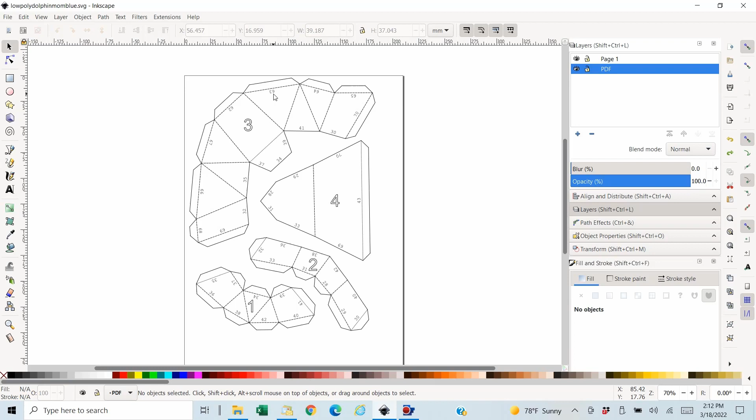So I think for this, instead of doing each piece separately like I showed before with the numbers separate and the score line separate, what I'll do on this is all the numbers first. I'm going to zoom in a little bit so I can see better.

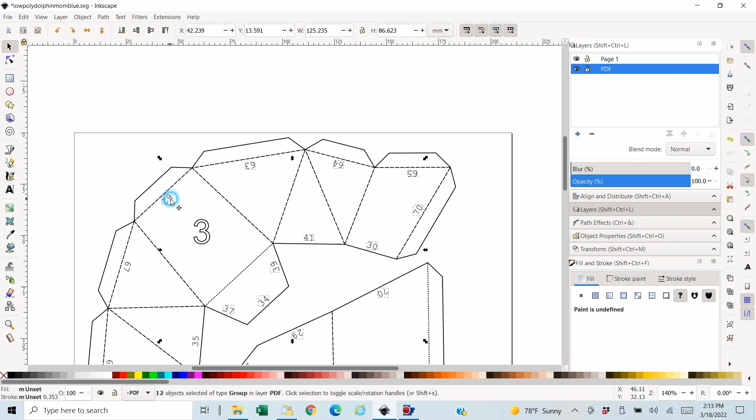It would be nice if Edit, Select Same worked for this, which it does with some PDFs, but it did not on this one. So we'll have to do each of those separately. Go around - it's a little tedious, but it still is, I think, more optimal than printing and cutting and scoring by hand.

So in this case, I'm doing every number on the page, not just per piece. I can sort of eyeball it to see if there's a little bounding box around it, to confirm I've clicked it. But inevitably I'll miss one, and I showed you before what to do about that. Hopefully this time I won't, but if I do, I can show you again.

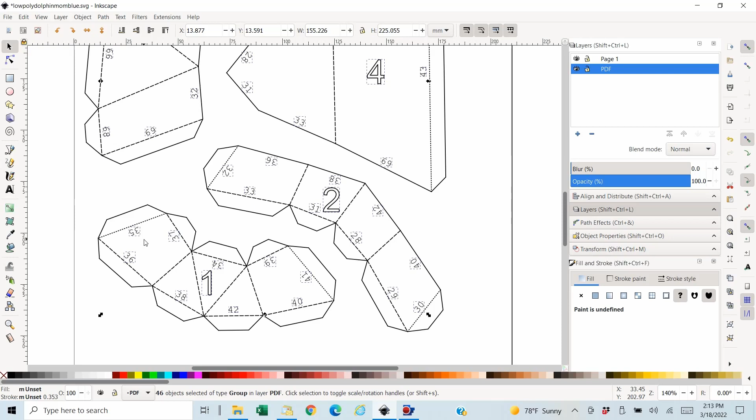So, seems pretty good. I'm going to edit, cut, and make sure I got them all, which I did.

Good, so I'll go to page 1, edit, paste in place. Remember, while they're selected, do object to path and combine. So now they're all together.

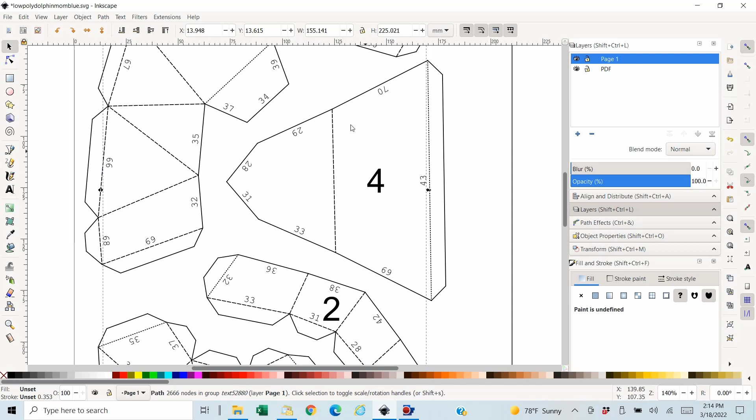So in Design Space, I'll only have to change that to pen and it'll take care of all the pieces, but I won't be able to separate them. So there are trade-offs with both ways.

I'll hide page 1 for right now. And so now I'm going to grab these valley fold lines, and it looks like most of them are that type.

I'm going to combine these even across pieces so that when I'm in Design Space, I only have to change them to score type once instead of piece by piece. They'll be combined together, so that's not good for separating the pieces, but in this case, I know that'll work for what I'm doing.

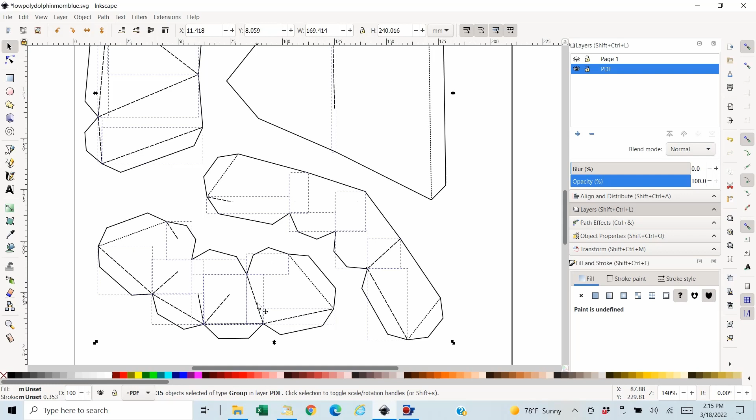I think I have them all. I'll do edit cut. See, I forgot one there. So I'm going to edit paste back in place, keep them still selected, and add that one. I'll try it again, edit cut. Told you I'd probably miss one. And I missed another one. So we'll do edit paste in place. And I'll grab this one.

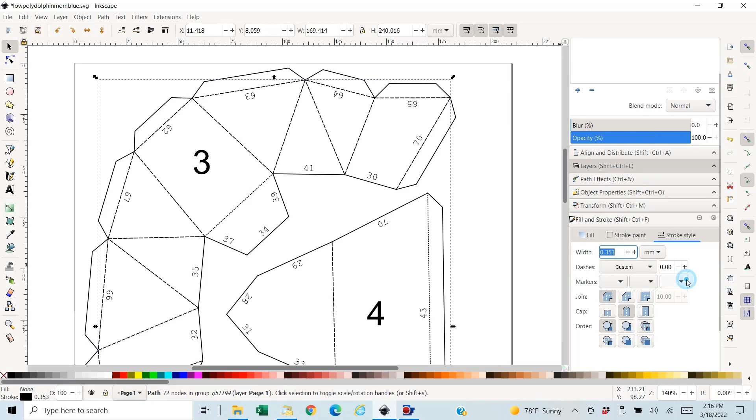Now we'll edit cut and go to page 1, turn the visibility on and do edit paste in place. While they're together, we'll do path combine. Go to stroke style, change from custom to a solid line. Now's a good time to save. It's always good to save your work because we don't like crashes to happen after we've done some work. So I'll hide page 1 and see what's left.

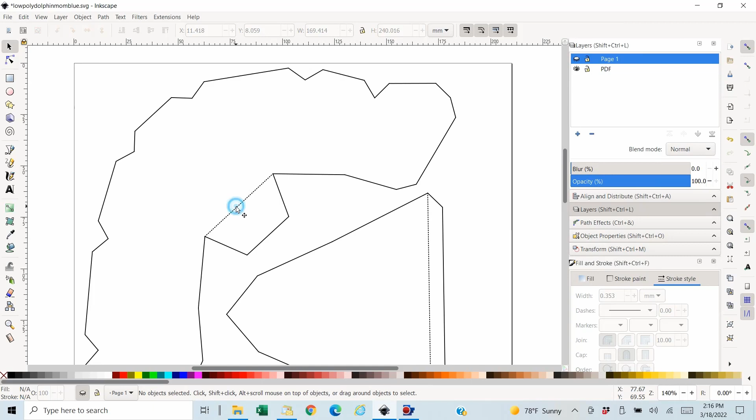So we've got a few mountain fold lines. This is a pretty simple PDF as far as number of pieces per page. I've had some that had 12 pieces per page and there were dozens and dozens of numbers.

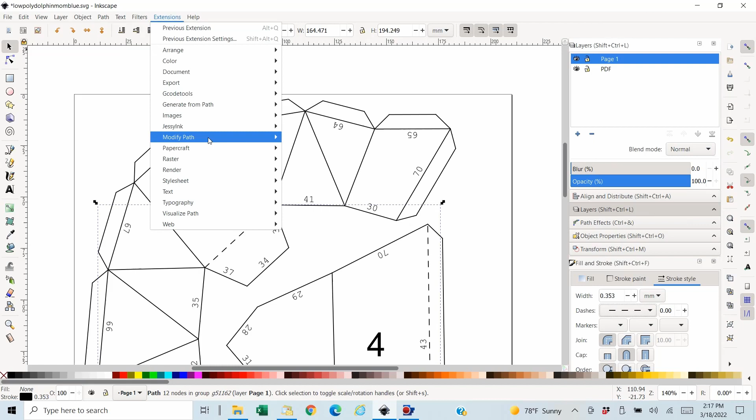All right, so edit, cut. Make sure I got all those lines, which I did. Turn on visibility of page 1. We'll edit, paste in place. We'll combine those. Remember, these we want to turn into dashed lines. Then go to extensions, modify path, convert to dashes. And I'll save it.

Turn off this page and see how we're doing. So we've got everything except the outlines.

Here I don't think I could just fill this shape. I don't think it's a closed loop. No, that didn't work, so I'm going to have to at least combine these paths. I'm going to try to grab these first, might be easier. Make sure I get all of them.

I'll zoom in and see what I got. And I got a few here by mistake, so I'm going to unclick those. Sometimes it's just as easy to click and select as it is to do the bounding box select. Now, that one might work. We'll see what happens.

For this one, I'm going to just cut for a minute and see if it cuts just these or also cuts that out. All right, it didn't grab any of these, so that's good. So I'm going to paste back in place. I like to work on this layer when I fill this. Didn't I say paste in place? Oh, on page 1. I want to edit, paste in place.

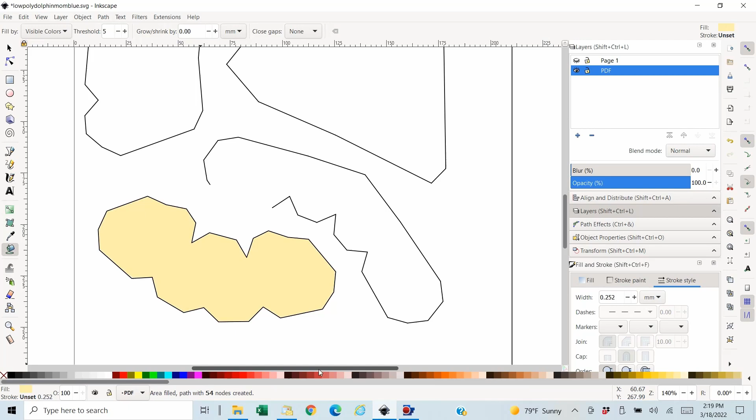I don't think I need this whole big box, so I'm going to hold down shift and not do that one. Now it looks like these are just the outline, which is what I want. So I'm going to combine those and fill. I should change the color because this is going to be blue, just a light blue.

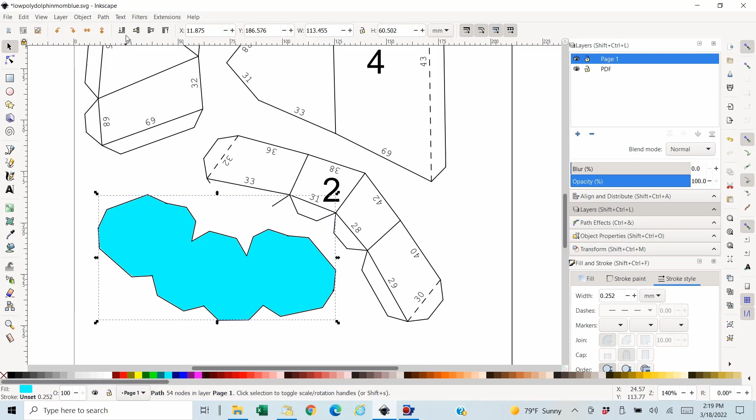All right, and then we will select that, cut, go to page 1, paste in place, move to the back, turn off visibility of page 1, save.

There's something here, so what I'm going to do is delete this first from this PDF layer. I'm going to click on whatever this is and delete it. That's just particular to this PDF, I've not seen that before. I don't quite know what's going on with that.

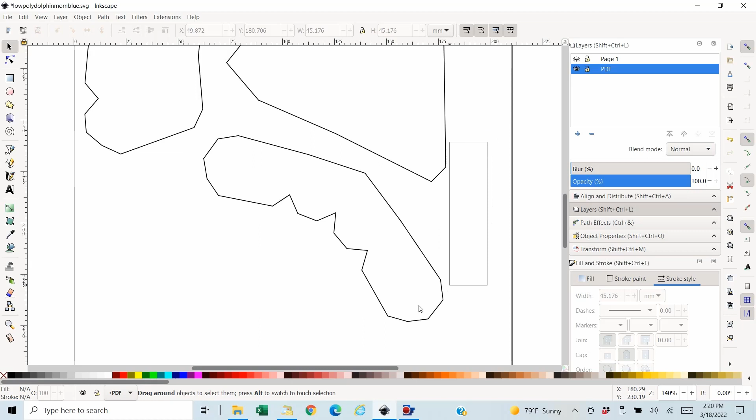So we'll try to grab this piece. I'm going to mostly— nope, I didn't get the top of it. Mostly grab, I still didn't get the top of it. Mostly grab that. And I got this line, which I don't want. And I got this, which I don't want. So it looks pretty much like this is what I want.

Although all of this, it looks like there's something there too. So I'm going to hold down the shift key and click here and see if I can get rid of that big bounding box, which I did. So these are just the lines, and it didn't get these. So let's click that, and that, and that. Now it looks like I got it.

I'll cut them just to see. Okay, and I'll paste back in place. That is what I wanted. That certainly reveals there's some junk there and some junk there. So for right now, I'll just move it to the top, and I'll combine.

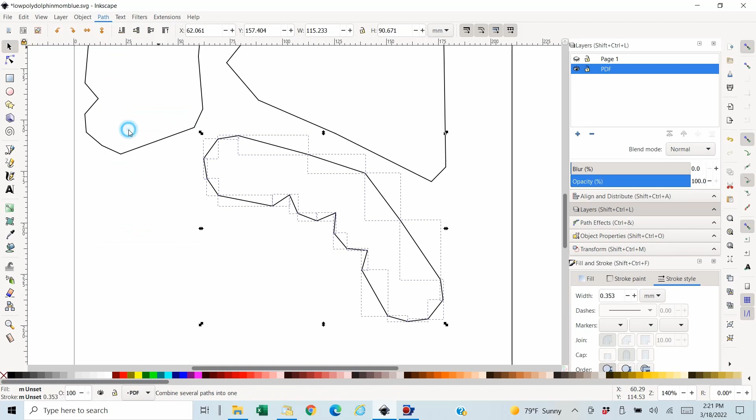You don't want to move this because the lines and numbers we've already done are positioned for this to stay exactly where it is. So that's why I'm not trying to move things around before I get them grouped and combined.

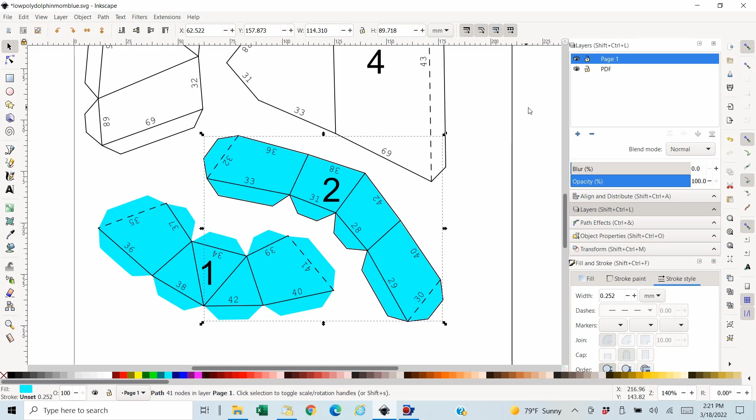So we'll fill this, grab the fill, cut it, go to page 1, paste in place, move it down, turn off page 1 visibility, and save. Save often, as I've mentioned before.

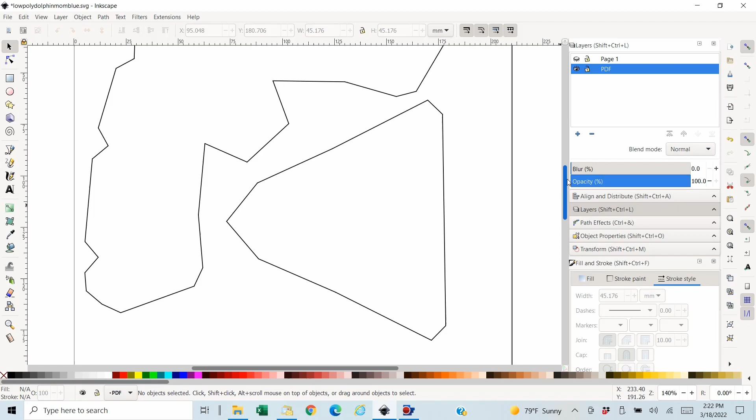Going to take this and delete it, and there were some things here showing up so I deleted that. They probably won't matter because they're just on this PDF level, but might as well get rid of them.

All right, let's do this piece, see what we can do, get most of it. Here's a square that doesn't look like it belongs. I'm just going to click off that and see if I can grab it and delete it. I don't know what this person did with this PDF.

All right, so that looks better. I didn't want this little line, I didn't want this one. That looks pretty good. We'll cut and see. Yep, we'll paste back in place. We'll combine.

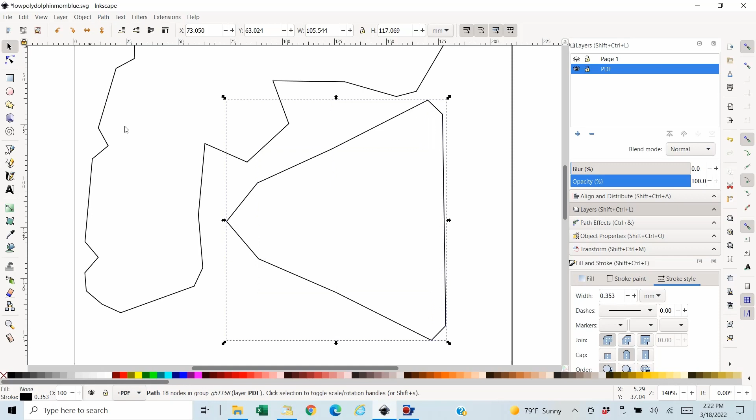Fill. Select it, cut it, move it to page 1, paste in place, move it to the bottom. Close page 1 visibility, go back to the PDF.

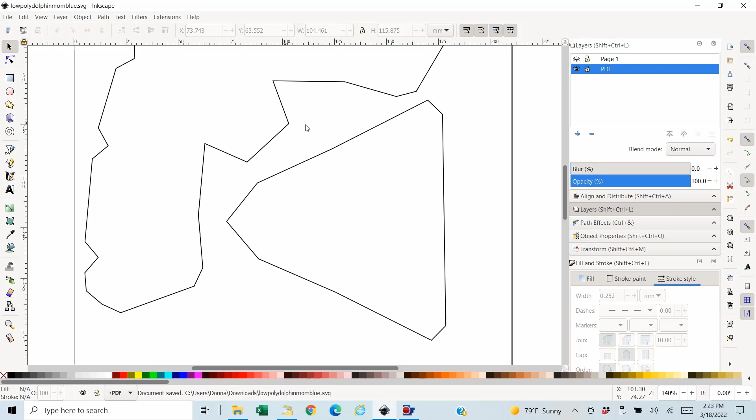We'll save, and we'll delete that. The reason I started with those pieces is because this piece is odd shaped, and it's going to be easier to draw a bounding box around it once those are out of the way on this PDF layer. So now we'll select all of these, and I don't see any giant white boxes, so that looks pretty good.

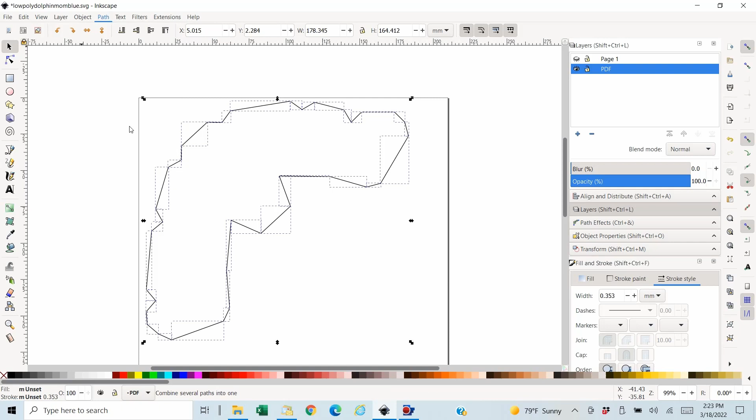So just make sure, I'll cut it and see. Yep, paste it back in place. I will combine into one, put a fill in it. I'll cut the fill, go to page 1, paste in place, move it to the bottom, and save.

And I'm going to do something a little different this time. Instead of cleaning up the PDF, I'm just going to delete this layer and I'll start with a new one when I bring in other pages. That way none of those white boxes and extra stuff is left around.

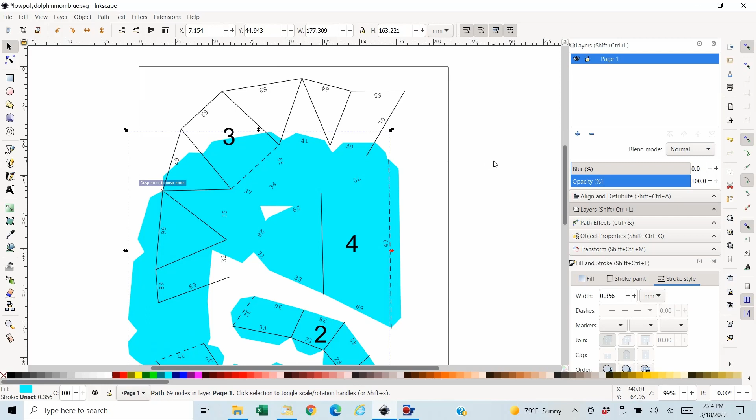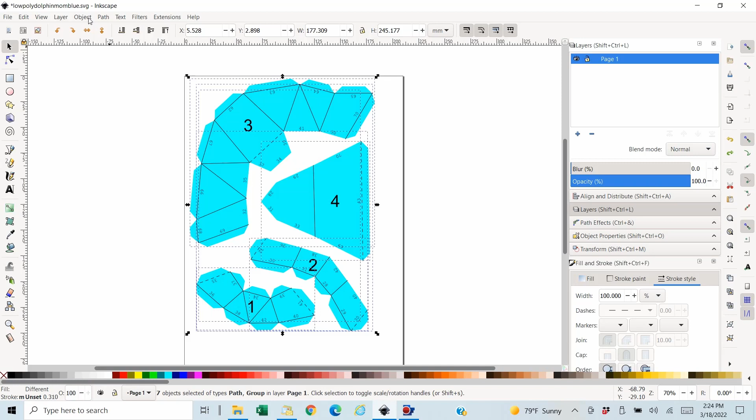So we don't need to group each piece now, because all of these are basically together. So what I am going to do is group all of these because these were one page, and I'll move them off to the side.

And now we'll do the rest of the pages of the PDF from that dolphin mom blue. Okay, these are all of the pages of the blue dolphin, the blue part of the mama dolphin. As you can see, we had 10 pages over here from the PDF. Each chunk, as I explained, I did differently, so each individual piece is not separate, but each page was grouped. So now I just want to arrange them on the page so that they're fairly close together.

It's jumping around a little bit. I think it's because I have screen capture on. Come on.

Let's try and snap. So we'll just put these. It's not going to matter how close together they are in DesignSpace because you can't move each piece separately. But some of these that were on the page by themselves, like this one, and that one and this one, it doesn't look like it's got numbers.

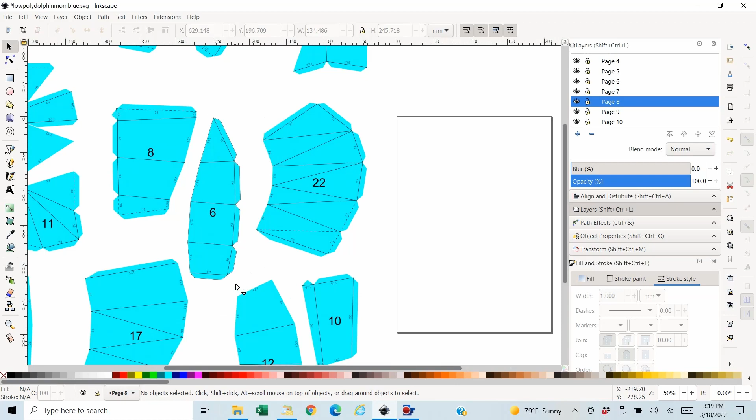This one doesn't look like it has numbers. I know it doesn't have any score lines. I'm going to zoom in and make sure I move the blue to the back. All right, I did, a little worried there. It's a lot involved. Okay, so now I will group them all.

And change the measurements to inches here. I will note the width and height here, because I want to match that in DesignSpace, at least to start, because then it will match the dimensions relative to the size of it all with the white part of the dolphin. So I will save.

And I could have saved this as part of the other file, but I went ahead and made the blue part its own file. So I'll open it in DesignSpace and show you again how that works.

All right, I've started a new project in DesignSpace. I like to make my canvas a light gray. Go to upload, we'll find that SVG.

It thinks it's large, but it really loaded pretty fast. I'll upload it, grab it, and put it on the canvas. Of course, at the current size, it's way too big for any mat that Cricut has.

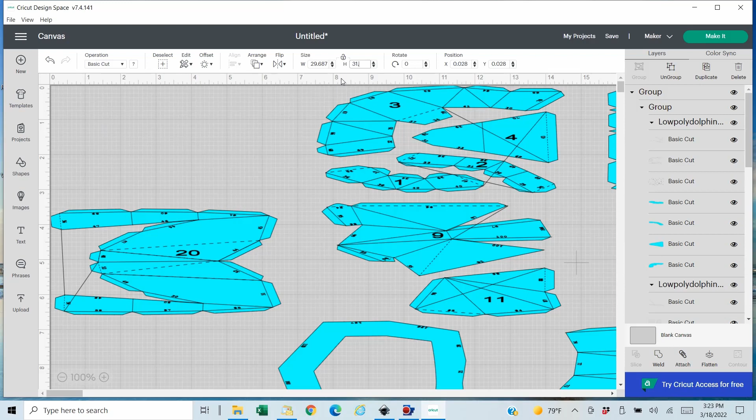So now it's in proportion to the size of the white part that we did earlier. We can zoom out, and all of this is grouped. We'll ungroup it. And now, I guess it's all grouped again. For some reason it groups it twice. So now basically each page is its own entity, some being one piece, some being one or two.

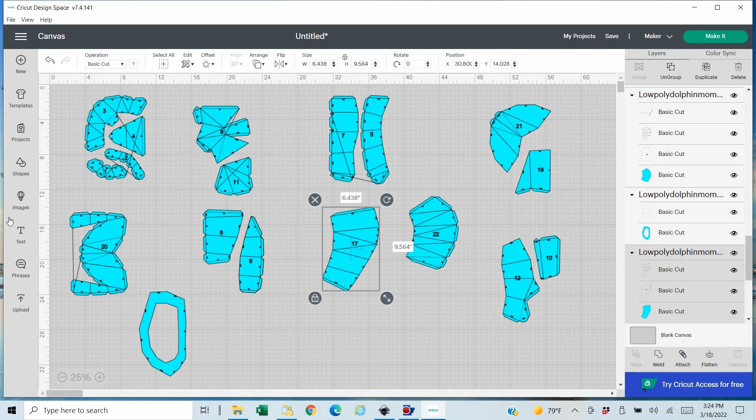So we have to go into each chunk and do what we did before. I'll start with this one, and you'll see how it is. So we'll zoom in a little bit.

So before, on the white part, we would have to do each of these four pieces separately, but since they're grouped and the numbers are actually combined, we can't, but it kind of makes it easier too. Again, it's a trade-off with what you want to do.

So what we'll do here is, this is what we have selected. So each of these colored blue parts we want to keep as basic cuts. We want to find the pen. Thinking it's that, I'll just try this.

I'll change it to pen. We'll pick extra fine point. And we'll do red, even though I'm going to use a blue pen. And see if it changed it. And it did. So at least that way I can see that that's what that was. So those are the numbers.

Now this errant line tells me that that's going to be these dashed lines, because that's what seems to happen. So we know it's not these that are basic cut, it's not the pen. So one of these two is going to be score, and one is going to be kept as cuts.

So this one, hard to tell. Okay, I'll click on this one first. Since it's not grabbing these score lines up here, we know it's not the scores. It must be the dashed cut line.

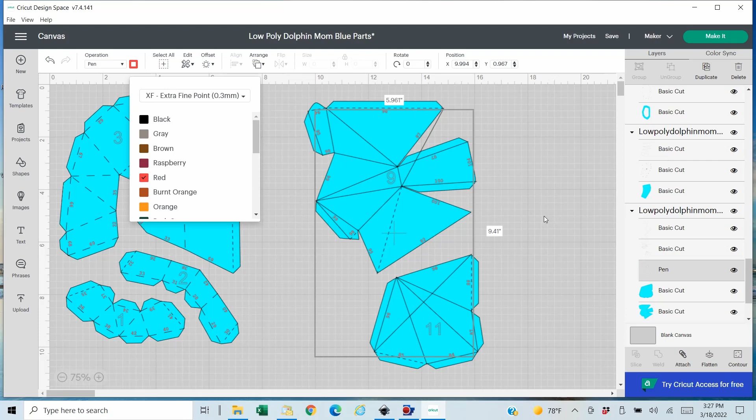So we'll select the whole group again. We now have pen and basic cut. One of these other two is going to be scores, and one's going to be the perforated cuts. This one didn't get this score right here, so I know that means it's the dashed line cut.

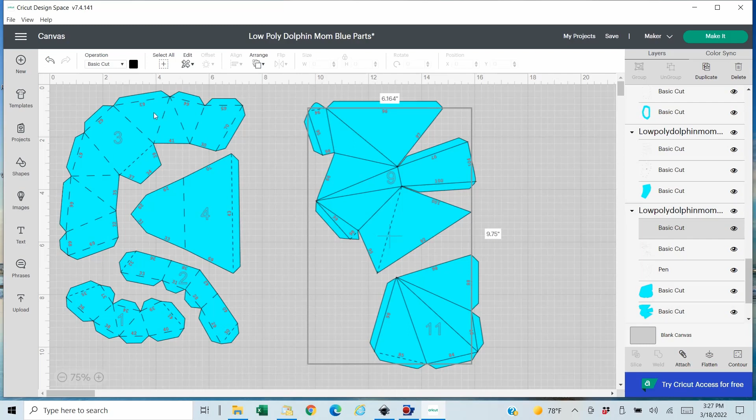So we want to go to contour, get rid of some of those extraneous lines. This one has these two, see how they're grayed out from those? Just exclude them, it's nice they're always at the top. Select this group again. We now have this basic cut, which means these are scores.

If I select the right one. And always, most of these you can undo fairly easily. That was good, I tried undoing a couple things that did not really undo the way I wanted. So I'm hesitant to do that if I don't have to.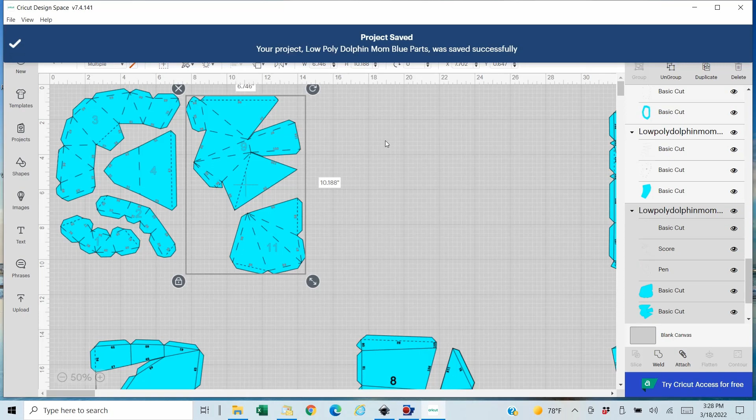All right, I'm just going to finish these up and send these to the Cricut maker and cut and assemble. Enjoy. Here's a little recap of what we just saw.

Import a PDF to Inkscape, one page at a time. Then I use layers to organize the elements more easily. I grab the edge numbers. I do path object to path, and then path combine.

I grab the valley fold lines. I do path combine and then I change the stroke to a solid line. I grab the mountain fold lines. I do path combine, then change the stroke to a 3-dash line. And then the important part on that is extensions, then modify path, then convert to dashes.

Then I grab the outline sections. I do path combine. Then I bucket fill the desired color and I remove the stroke. I save the SVG, open in Design Space.

I change the edge numbers to pen extra fine. I change the solid valley score lines to the type score. I use the contour tool to remove unwanted errant lines from the mountain fold dash lines, but I leave those as basic cut. I send to the machine that will score, draw, and cut the pieces, and then I assemble and enjoy.